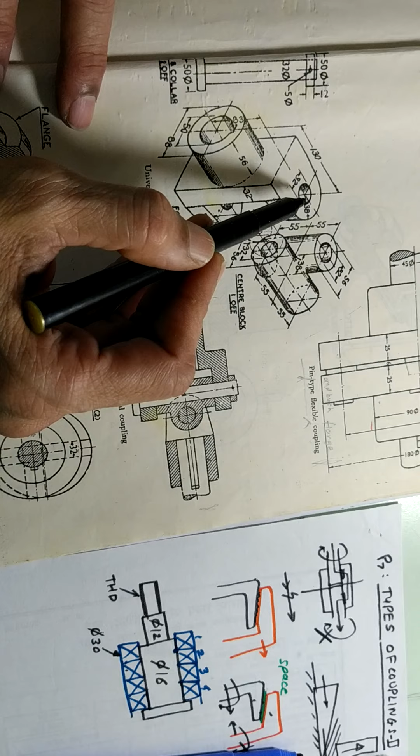And because of that this pin will not fall down. So as a result the connection takes place. So you can just have a look at this same figure. So this shaft is what we are going to fit here.

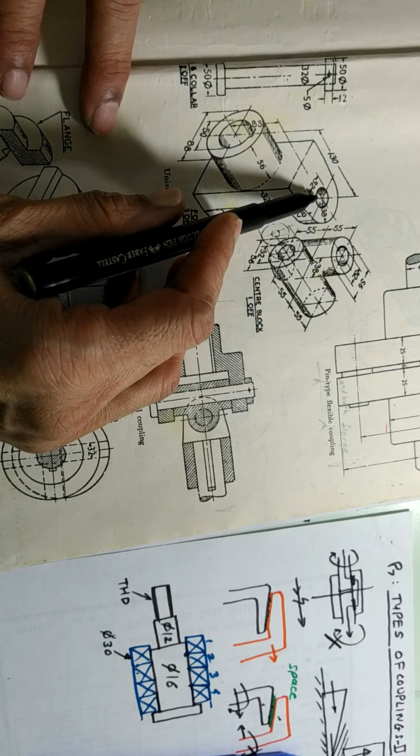This hub is this hub, this fork is this part of the fork, then this 32 mm diameter hole is here. So this is the hole in the fork, this is the other hole in the fork, then this is the hole of the center block which is here, this is the center block, and then this pin with a head here is passing from below.

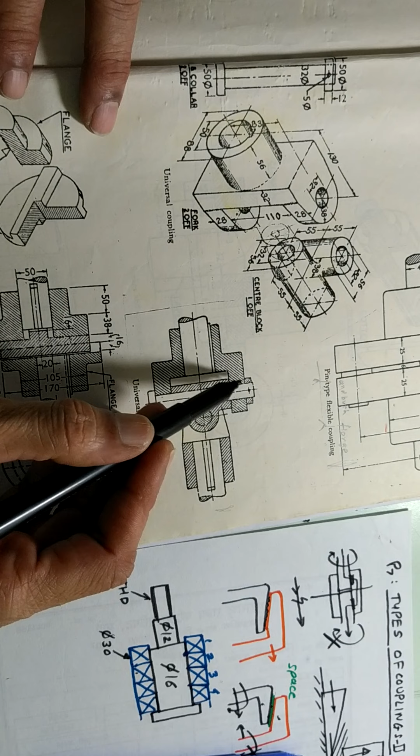The pin comes out. When it comes out, this collar is fitted here, and through this a lock pin is fitted, so that, what we have just now described, this fork is holding the center block with the help of a pin and a lock pin. So after this much is done, now what happens?

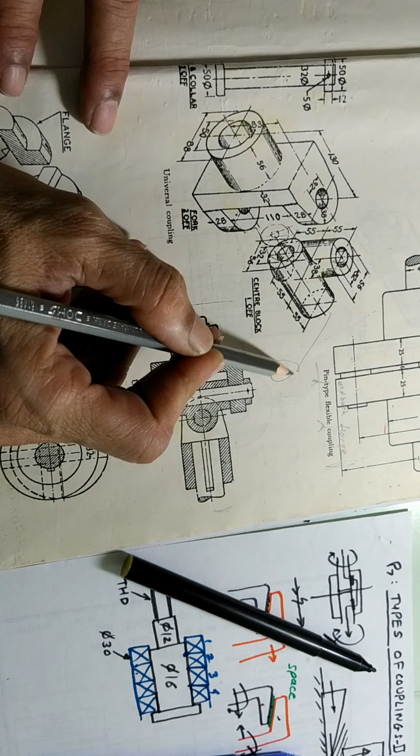You can see there is one more cylinder here, integral with the vertical cylinder. Now this cylinder, which is shown like this right now, can be rotated in this direction. So you rotate it and you can bring it in this direction like this.

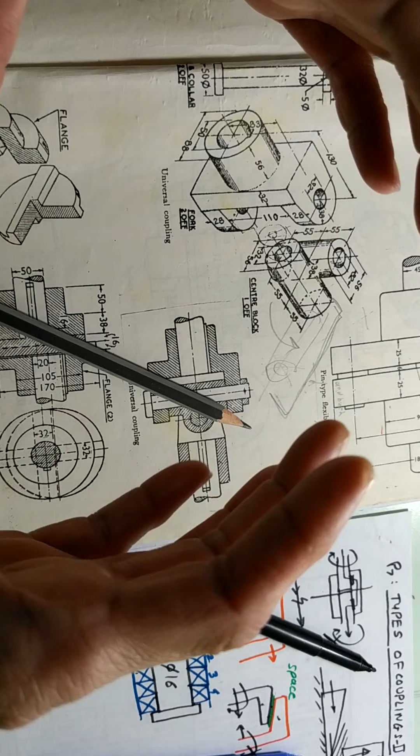So once you make it like this, then there is one more fork here on the other side. So this fork you are going to fit like this in the inclined direction. So this fork is at 90 degrees to this fork. So if I hold my hand like a fork, then one fork is like this, the other fork is like this. Like this.

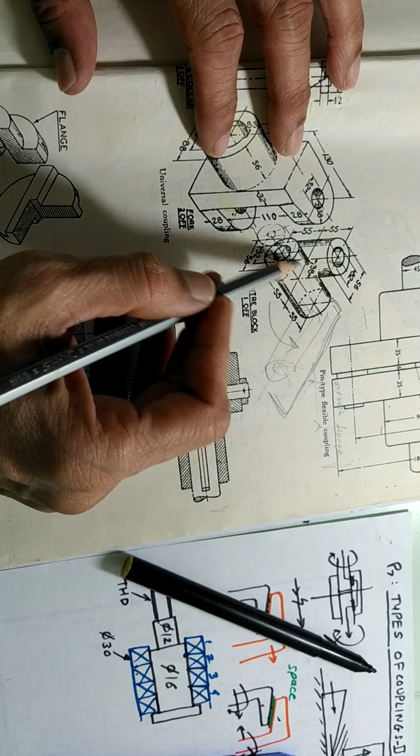So one fork like this, other fork like this, and the center block which is like this, one is fitted in the vertical, other is fitted in the horizontal fork which is on the other side. So this particular horizontal cylinder is shown here, and then this fork, the second fork which is there on the other side, this is one fork, this second fork.

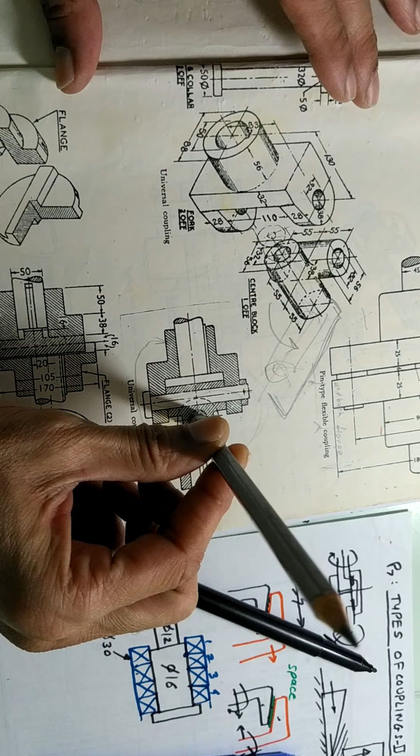So this fork is shown in horizontal position, and the two sides of the fork again have got 32 diameter, and the second pin is put in this direction. So one pin is like this, and the second pin is perpendicular to the paper, and again it is fitted to the second fork.

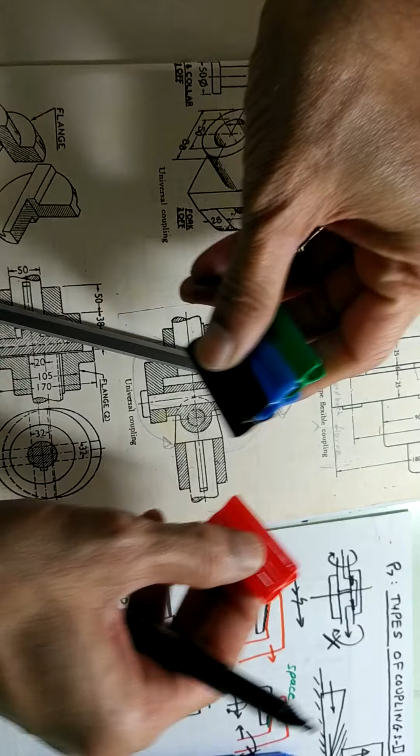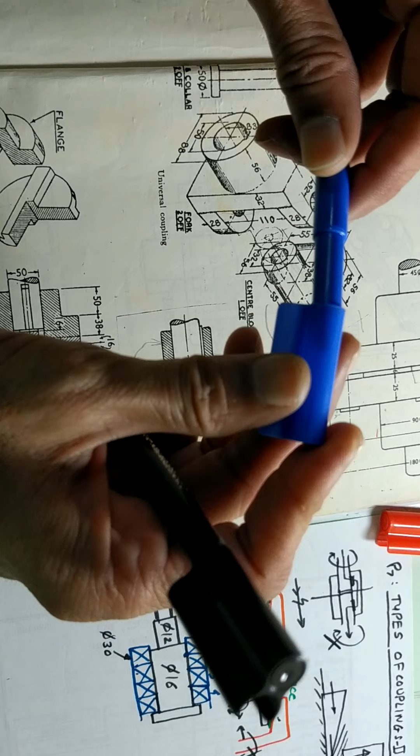So now, between the two forks there is a center block, and this center block is connecting the two sides. So let's say if I hold it like this, suppose these two pins are connected, they are fixed to each other. So these two pins are forming a center block, and my hand is working like a fork. So this one fork, this second fork.

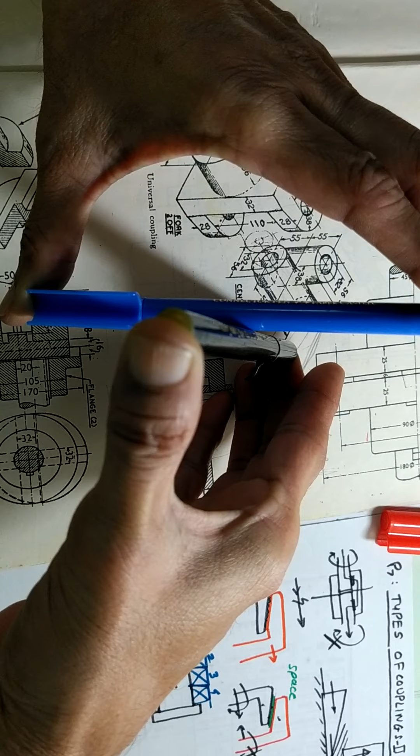So these two hands means two forks, two shafts coming from two sides, and even if these shafts are at some angle, still they can transmit the drive. This center block will have a very complex motion, and as a result the drive will be transmitted. You will have to slightly imagine further as to how it will work.

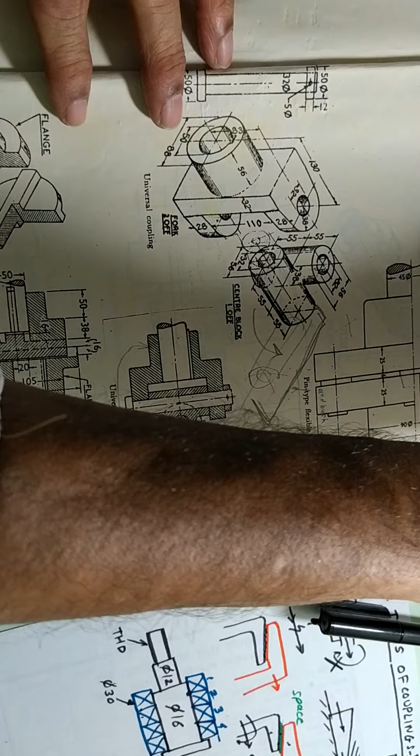So even if the two shafts are inclined, one is like this, the other shaft is inclined to the extent of 15 degrees, still it is possible to transmit the power from one shaft to another. That is the advantage of this type of coupling, which is called a universal coupling.

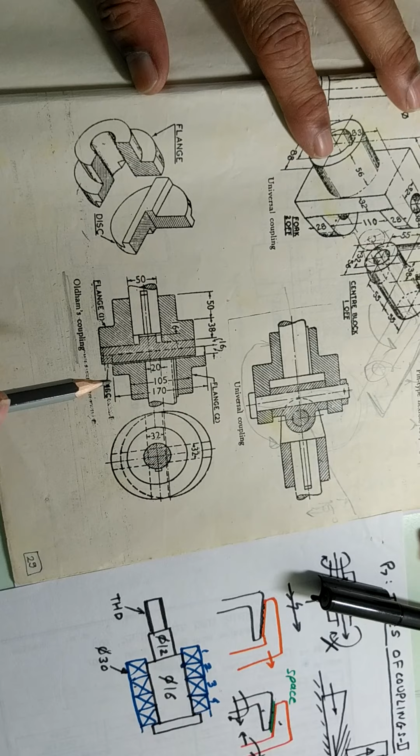Now let's see the next coupling. This coupling is called Oldham's coupling. Again, this is a coupling used for transmitting power from one shaft to another, but the shaft axes may not be in one line. So now see what this says. Suppose this is one shaft and this is another shaft.

Earlier we saw all the couplings, they were having the axis in one line like this. Then we saw the universal coupling, where one shaft was having its axis inclined like this. Now we are going to see where this coupling is used. This is used when the two shafts are like this, but they are offset.

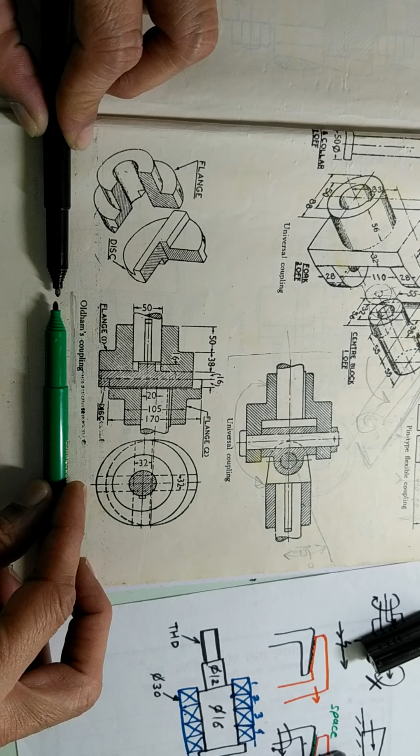Offset means they are parallel, but they are not in one line, and there is some distance between the two shafts. So when there is a distance between the two shafts, how are we going to transmit power from one shaft to another? In this example, Oldham coupling is what is used. So if you see this sectional view and then the isometric view, we can study how this works. So look at this coupling sectional view.

This is a shaft on one side, and this is a shaft on the other side. This is the axis of the left side shaft, this is the axis of the right side shaft, and the two shafts are at a distance of 20 millimeters. So they are not in one line, they are offset by 20 millimeters, and we still want the power to be transmitted. So see what is done.

On this side there is a flange. So this is one flange with a hub. With the help of a key, this shaft is connected to the flange on this side. Similarly, the right side shaft is connected with a key to the right side flange. So this is flange number 1 here, flange number 2 here, two shafts, two flanges, two sides.

They are offset by 20 mm. Now how is the shape of this flange? That we will see. So look at this flange, what they have shown. This flange has got quantity 2, so one on this side, the other on the other side.

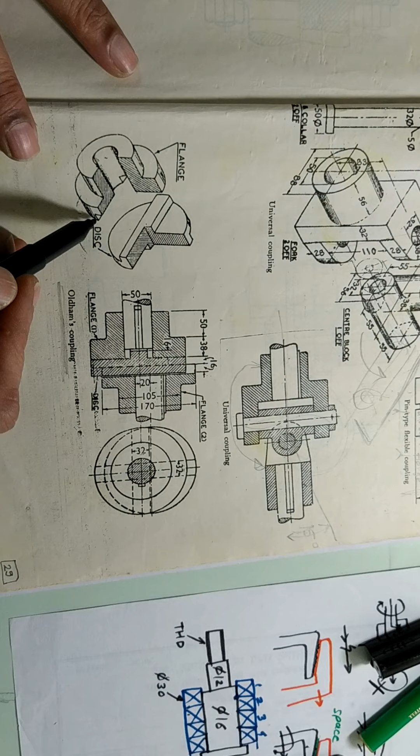And how is this flange? You can see here, this flange has got a disc shape, and in the disc shape there is a cutout. The cutout is not clearly seen, but you can observe this and this. That is a cutout. Now I will draw this flange in isometric again here, so that you will have some idea of how it looks.

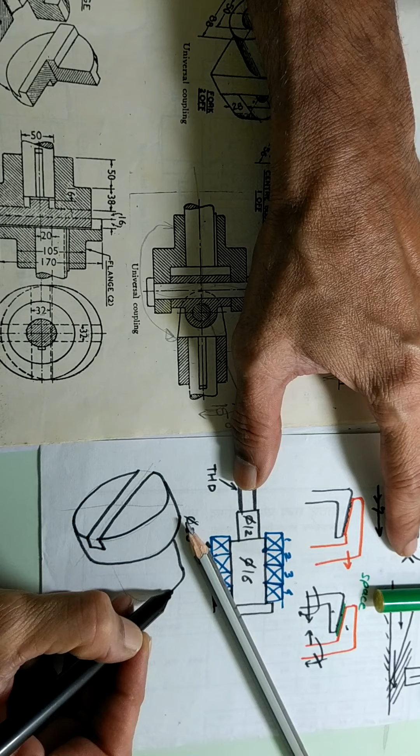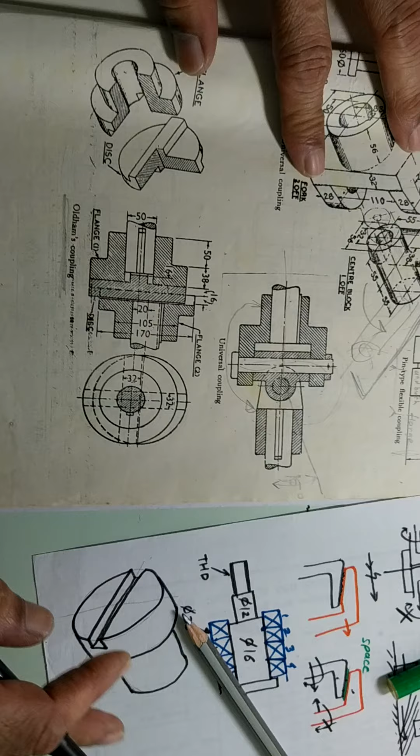So can you see what is drawn? This flange has got something like a keyway, it is cut like this. And a similar flange is there, with everything the same, so two quantity. So see now how the assembly is carried out. This is one flange with a slot, and on the other side again there is a flange which also has got a slot, and what is fitted into this slot?

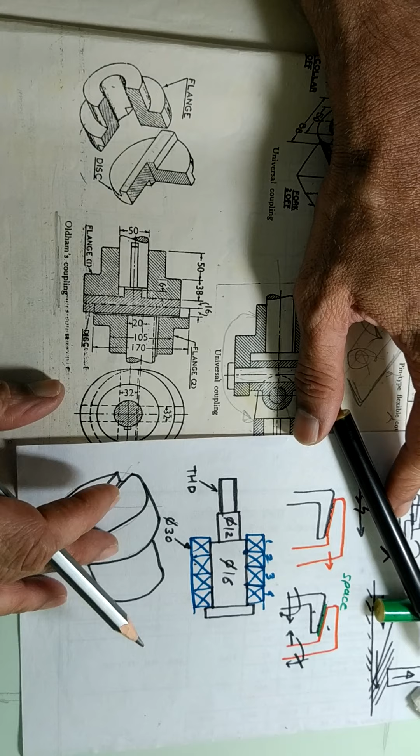Now you have to look at one more part called a disc. As you see here, this disc has got a keyway-like projection. One projection is like this and the other projection is on the back side, and it is at 90 degrees to this projection. So on a disc there are two projections. I'll just draw it here.

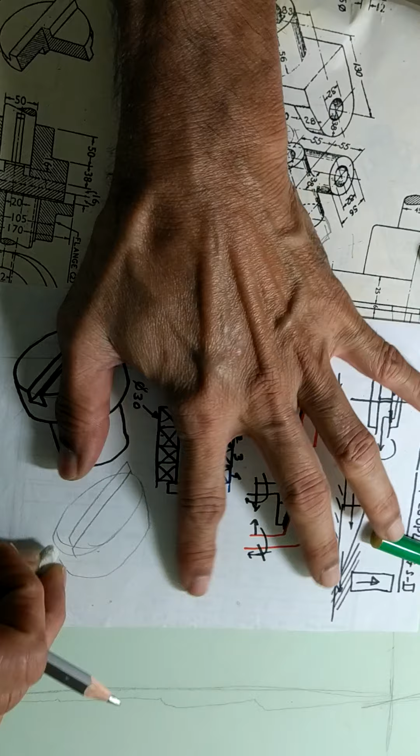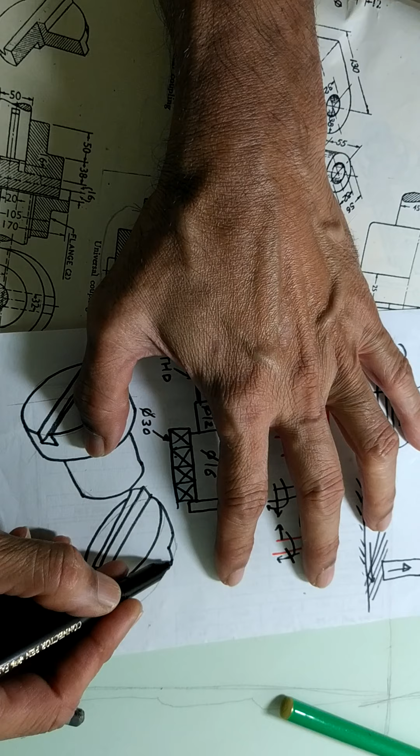This is a disc. On this disc, this is a projection on one side, and on the back side there is a projection like this. You can see something similar to keys. One key is here, the other key is here; one is vertical, one is horizontal, so they are at 90 degrees to each other.

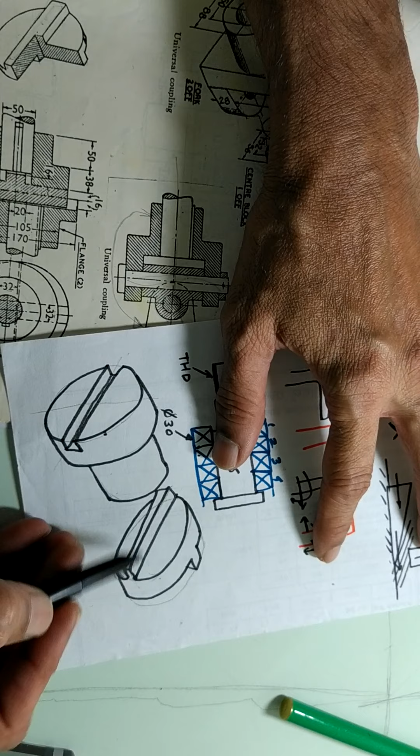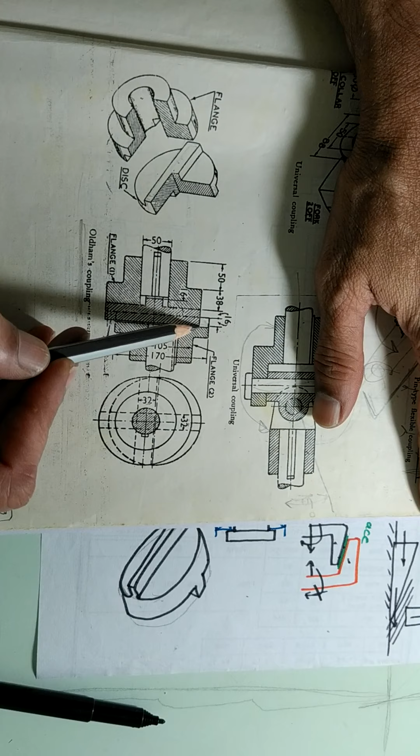So one flange on one side fits with this key, and the other flange on the other side fits with this key. If you observe the given figure, in one keyway the one-side projection has gone, and the back side vertical projection has gone into the similar slot on the other side flange in the vertical position. You have to imagine all this.

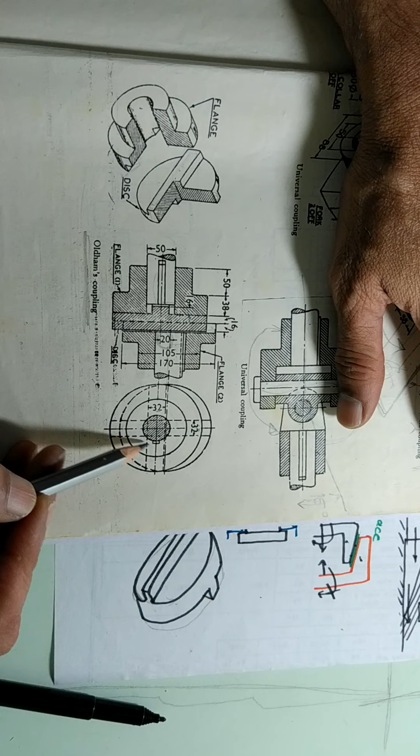You can see the end view. This is one circle, one axis, one flange, and this is the other flange which is offset. Therefore there are two circles, not matching, offset by 20 mm. So this is called an Oldham coupling, which we have just now learned, and now we are going to draw this figure.

For today's practice sheet, we are going to draw types of coupling number 2. First we saw solid flange coupling, then cone friction clutch, then pin and bush type flexible coupling. Then we saw universal coupling, which has two drawings, an isometric drawing and a sectional drawing.

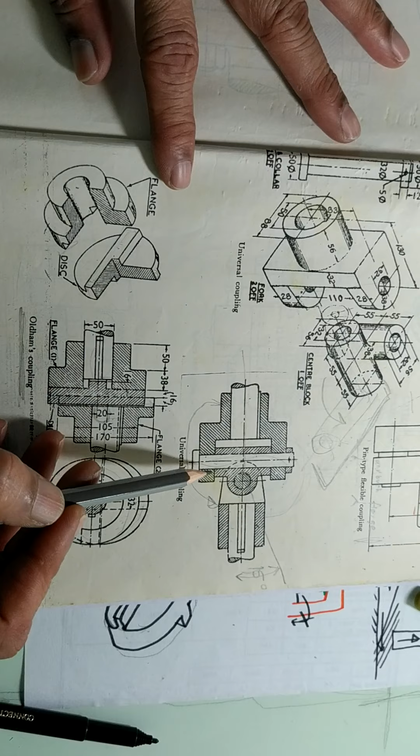After that we saw Oldham's coupling, shown in isometric and in sectional front view and side view. These are the types of couplings we have learnt in this session, and now we are going to draw them as freehand work, under practice sheet number 7, types of couplings 2.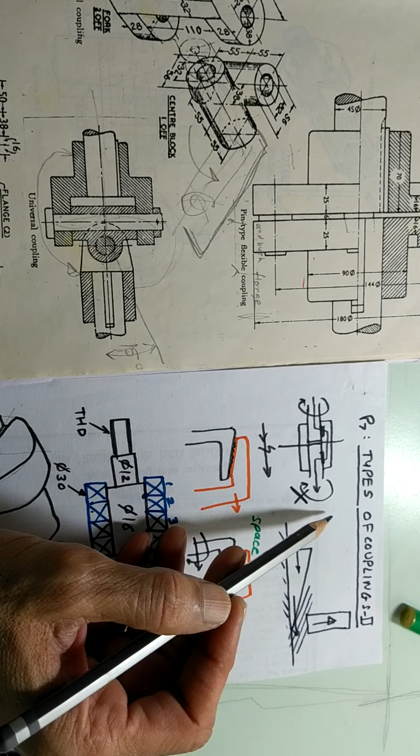Remember, you are going to prepare the work on the drawing sheet with a nameplate, and the nameplate you have to write by pen only, and that too by blue pen, not black pen. So use blue pen and write the nameplate.

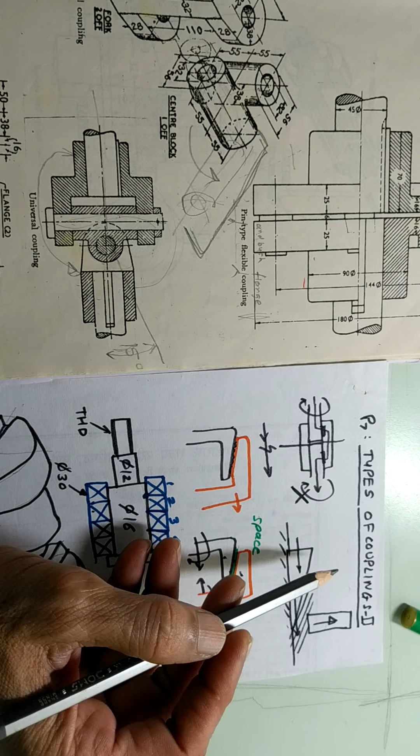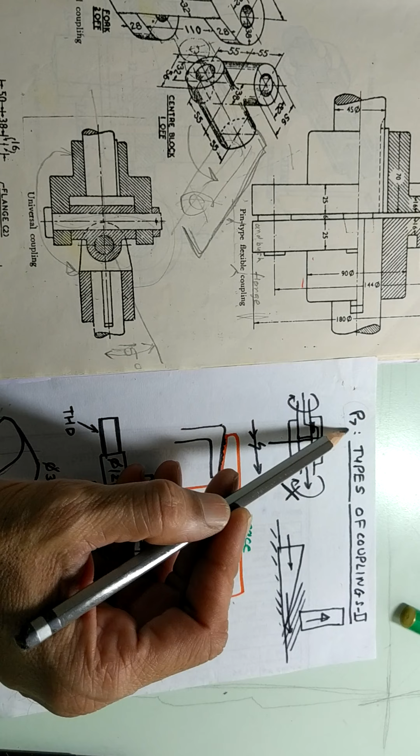If you are using more sheets, for the next sheet you need not prepare the entire nameplate. You can just write the practice sheet number like P7, the page number 1, 2, 3, and your roll number. That is enough. Suppose you used 3 sheets: the first sheet will have the nameplate, and the second and third sheets will have only the practice sheet number and your roll number.

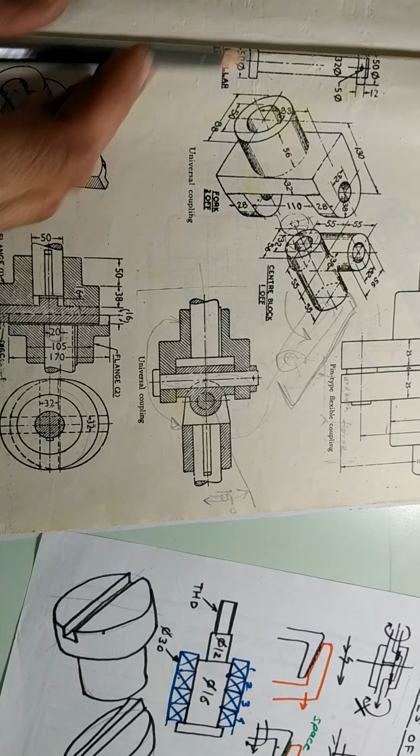Okay, so that is what we are going to prepare for practice sheet number 7, types of couplings 2, and you have to draw all the figures shown here: 1, 2, 3, 4, 5, 6 and 7, and of course some side views, etc. These are the things we are going to draw for practice sheet number 7.